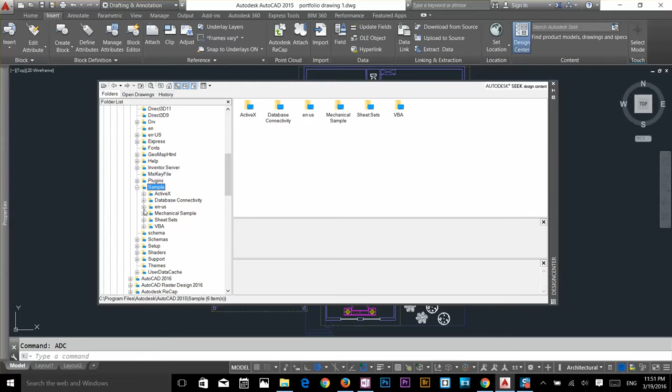So the main thing we're gonna do is go to this sample folder, maximize it. In the sample folder you need to maximize English-US, maximize that, and then there you can find this Design Center. Click on that and expand it.

So in Design Center you got a few drawings already made by AutoCAD. Let's say you are building kitchen stuff - you got a refrigerator, cooking stuff. Let's say you need to make a cabinet. In 2D drawings we don't really show what we are making, so we can use these cabinets made by AutoCAD already, free for us to use. Just click on this kitchen folder, or expand that.

Once you expand that, you get a few more properties of this drawing. You have access to blocks, detail view styles, dimensions, and layers. You can even import layers from this drawing to your drawing. But in this video I'm gonna talk about blocks.

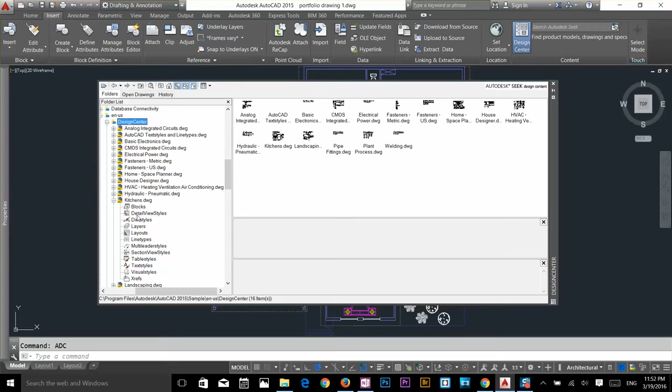So just click on this, and in this window you get the blocks. You can access blocks here as well, but I prefer using it here. You need to double click to open that block. So in that file we got these blocks made for us, and it's very easy to use.

So we got a base cabinet, dishwasher, phone jack. Let's say in the kitchen area I want to use this microwave - it's already been made, and in 2D drawings all we have to do is just use them. So to bring these blocks to your drawing, you can do it two ways.

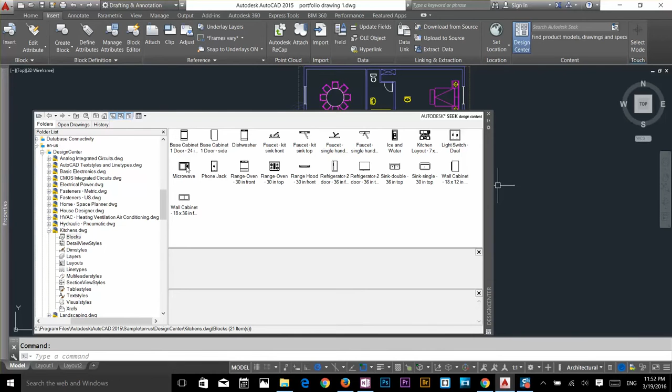You can click and drag and just drop it there, or you can double click and it will pop up the insert menu, where you can type the name. You can change the name of your block and click OK, which lets you draw but gives you a few more options. Once you do that, you get the rotation angle option - I want to keep that at 0, and I press spacebar now, which will drop that. If you drag it, it will come automatically at a 0-degree angle.

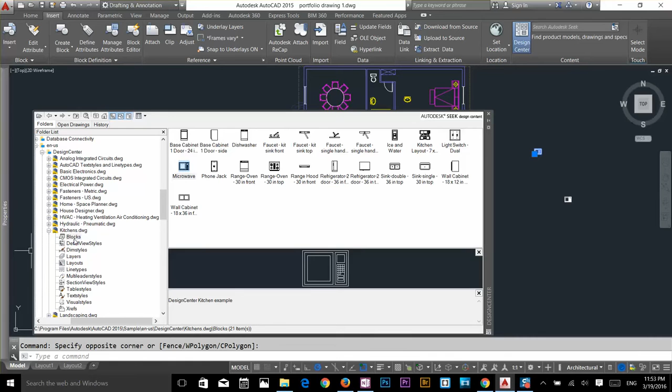So let's show you a few more files we got here. I use kitchen all the time because I work in architecture. If you work in electrical stuff, let's say you got this file 'basic electronics' - I expand that and go to the blocks. So you got battery, capacitor. I don't know about this stuff, but just to show you guys, you can use these as well.

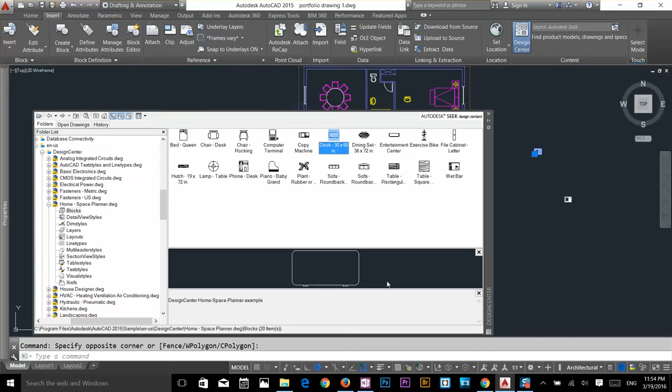Alright, let's go to Home Space Planner. If you expand that and go to your blocks, you got a lot of stuff here which you can use for your drawing. Let's say I've got a dining set here, a desk here. If you click on that once, you can see the preview of that block here. You got the sofa, piano - a lot of stuff here. So all you have to do is just drag them or double click to insert as a block.

So this is about Design Center. I hope you like it.

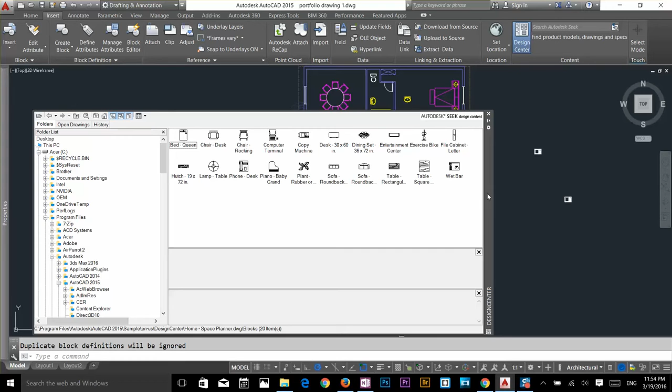Alright, now let's talk about Content Explorer. It's a new service that was introduced in, I think, AutoCAD 2012. Basically you can access the internet, and there are thousands of objects already made by AutoCAD or other people who upload them for you guys to use. So I'll close that and type Content Explorer.

Oops, I just opened that again. Well, type content, it will finish up the command for you.

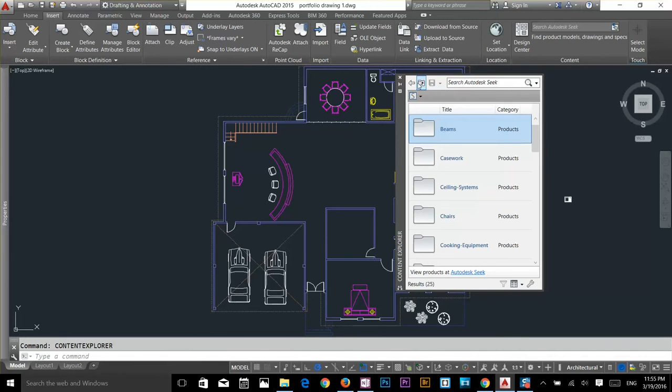Click here. Alright, so now I've got this dialog box here, which is called Content Explorer. I'm just gonna increase the size of it so you guys can see that.

Alright, so in this folder you got a few folders. Let's say you got a lot of products here: beams, casework, ceiling system, chairs. Trust me, there's like thousands of them available here.

Alright, so now to access the internet library, you need to make sure that you're signed into your Autodesk 360 and you have access to the library.

Let's find some chairs. Alright, so let me show you. You have to click on this arrow button and go to your Autodesk Seek. So make sure you're not on an Autodesk content service. If you are in there, then you have to search through your local library.

Let's say you got some stuff in your drawing design center, but you don't know where to find them, so you can search for them right there. Just type the name and it will bring it up for you.

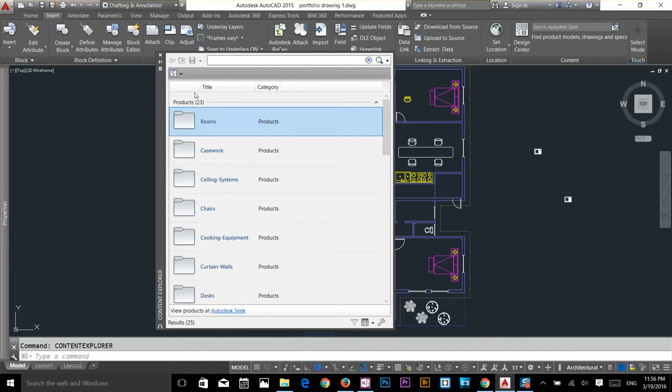But in this video, I'm just gonna access the online Autodesk Seek library. So I'll double click on these chairs. Alright, once I click, it's gonna go browse the internet and show me products, whatever is available.

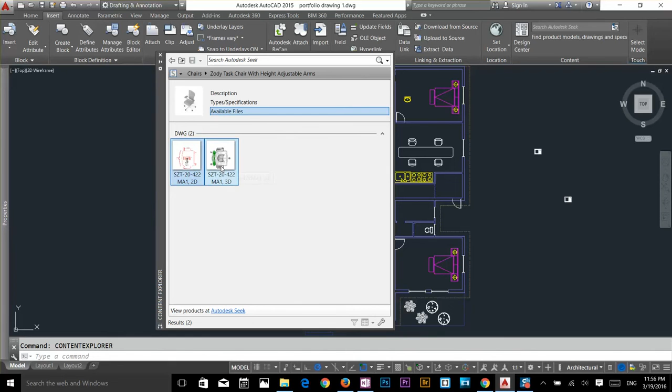Let's say I've got this chair, I like this chair. So to access that, to bring that into your drawing, you can see the number of files here as well. So double click that, it will open that drawing. In this chair, you got one 2D file and one 3D file, so you can use both.

So let's say I want to use this 2D chair in this room. To bring that in, you can just drag it. It's so easy, just leave your cursor there.

Now it's gonna ask you for the block name, because it's gonna convert that chair to a block, and it's bringing that from the internet. So it's gonna ask you to enter a name. I'll type chair 1.

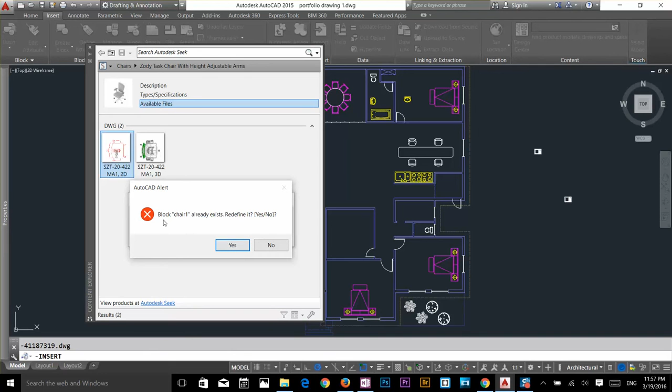Maybe I had another block before, so I click OK. It's telling me that chair 1 already exists, so I have to redefine. Click on yes.

Once you click on your drawing, it's gonna ask you to enter the scale factor, but I want to keep that one, so I'll just press enter. Now it's asking me scale factor Y, so I just enter again.

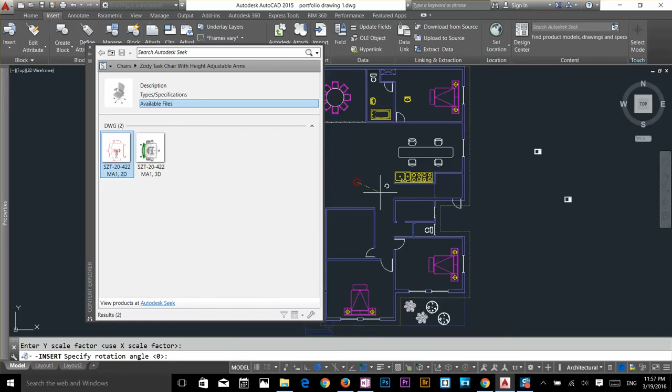Now I just zoom in to show you what's happening basically in the drawing. So after applying my scale factor, I've got this rotation. It's asking me to specify rotation, but I want to keep that at 0. You can even type whatever angle you want, but I'm just gonna press enter.

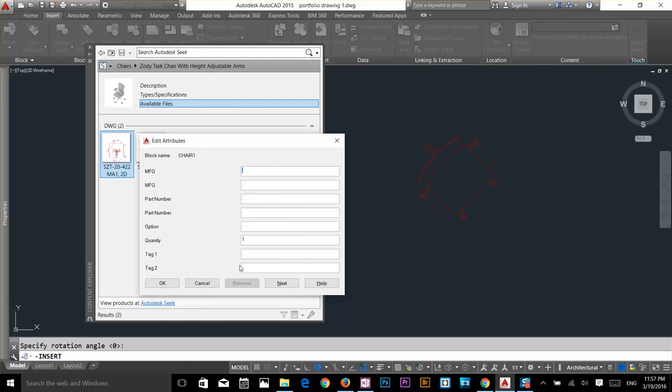Now it's asking me for block attributes. I can type a part number, options, give it tags, whatever you need. So I'll just click OK, and there you go.

We got the chairs from the internet. The stuff available in Design Center isn't really good, and it's been there since AutoCAD 2000. But on the internet there's a lot of cool stuff there.

Let me show you the 3D model of that. I just drag that here and drop it there. It's actually syncing that 3D model because the size is a bit increased, a bit large.

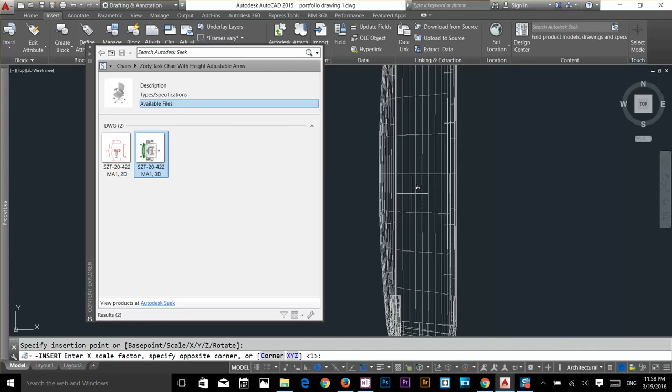So type the name, enter scaling factor, yes, okay, yes, and rotation angle 0, done. Click OK, and then you got your chair.

So you go to your 3D, go back to your home panel on your ribbon and change. Let's say you hold down your shift key and press your mouse wheel and just move. I don't want to go to my 3D modeling workspace - I've got a few series coming up for 3D modeling, so you'll see that as well.

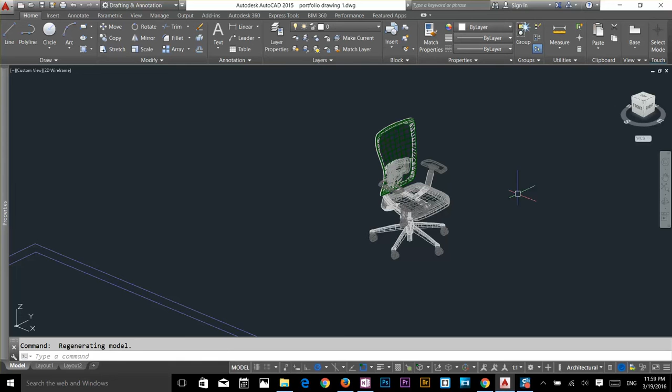Alright, so let's go for 3D Basics, and in the Visualize tab you can change that to shades of gray. There you go guys, you got your chair, and that's it.